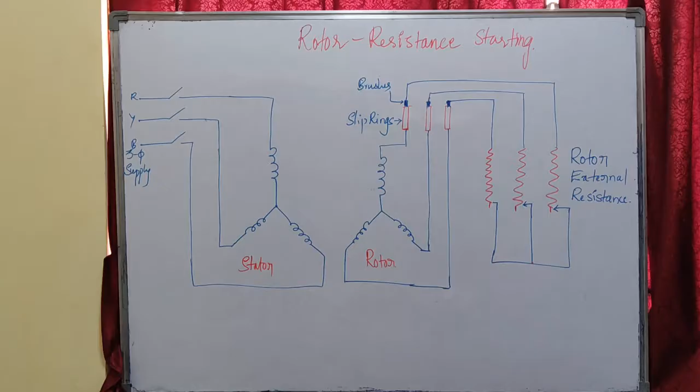Now let us discuss another starting method for our slip ring induction motor. This is the only starting method for slip ring induction motor, that is rotor resistance starting. For squirrel cage induction motor we were applying reduced supply voltage, but in case of slip ring induction motor we can apply our rated supply voltage directly onto the stator winding.

So the method is rotor resistance starting method. That means we are going to add some variable resistance in the rotor circuit through slip rings and brushes, and the rotor resistance is connected in star connection. The rotor of slip ring induction motor is always connected in star connection, whether the stator is connected either in star or delta, irrespective of stator connection.

So what we are doing is limiting the starting current. For that we keep the resistors in the rotor circuit. Initially they are at the maximum resistance position, meaning the three phases are having maximum resistance in the rotor circuit. By using this we increase the rotor resistance, so that our rotor current will reduce.

Our rotor current is directly proportional to our stator current, so the stator current will also be reduced. Due to increase in rotor resistance our starting torque will increase, and our power factor, which is the ratio of R2 by Z2, will also increase with increase in rotor resistance.

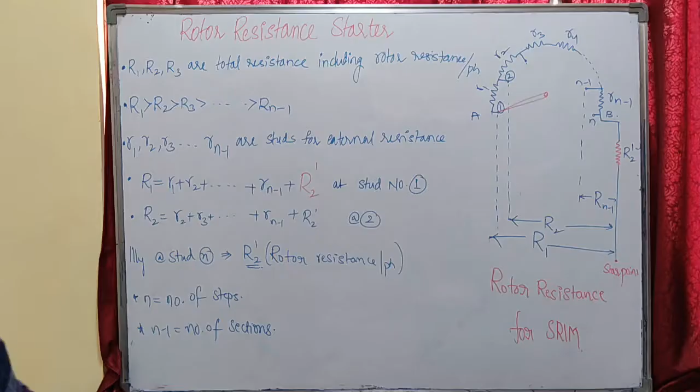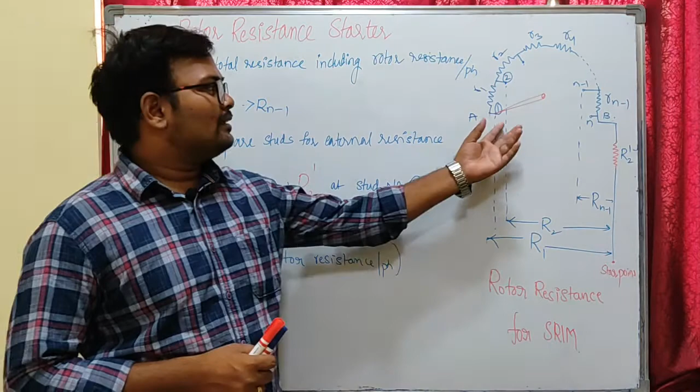Hello students, now let us see the rotor resistance method. As I earlier told you, we are going to add external resistance to the rotor circuit at the time of starting, which will reduce the starting current. Here this is the external resistance per phase added to rotor resistance per phase. The section A to B is the external rotor resistance connected to one phase of our three phase rotor circuit, that is R2 dash.

That means we will be having our rotor circuit connected in star in our slip ring induction motor. This is R2 dash here, our rotor resistance per phase.

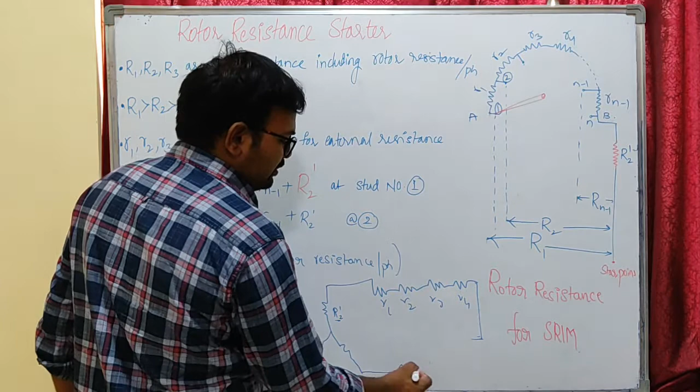So I am going to connect some external resistance. This is R1, R2, R3, R4 at the time of starting, and this will be connected in star only. These are the external resistances that are going to be connected for slip ring induction motors at the time of starting. I considered one phase here for simplicity.

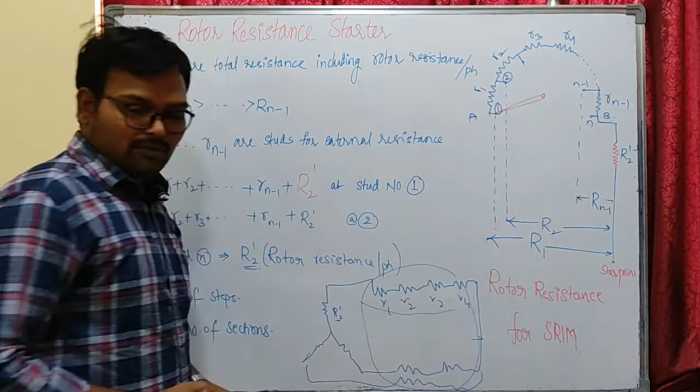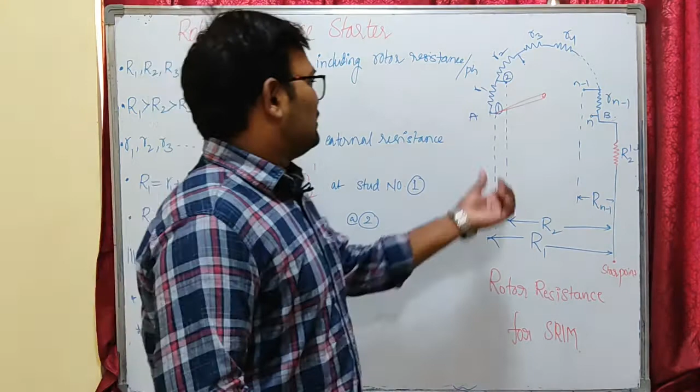Let us do some mathematical calculations for better understanding of our rotor resistance starting. Now we have to understand the rotor resistance first. Here you can see A and B is the section of rotor external resistance that is going to be connected with individual rotor sections R1, R2, R3, R4, up to Rn minus 1. The number of steps are 1, 2, and this is 3.

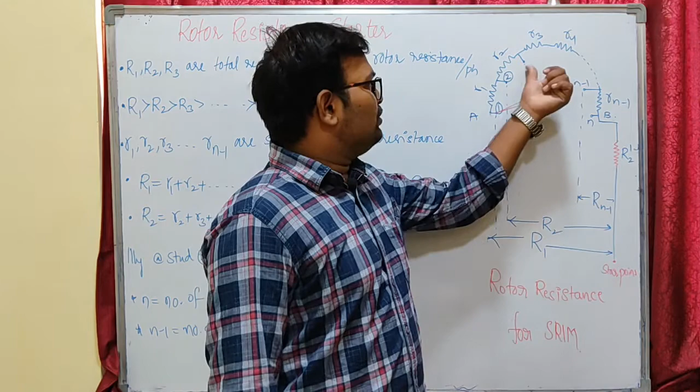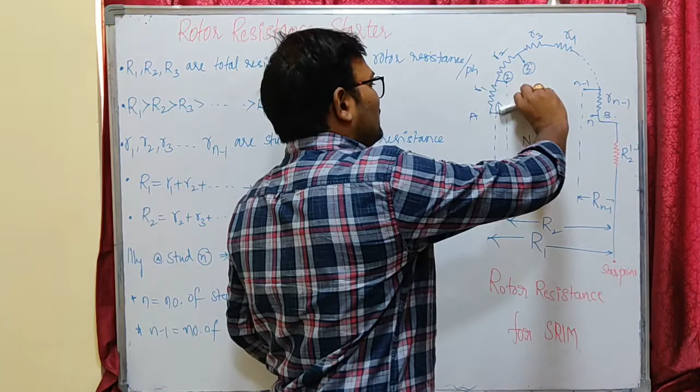We are going to connect the external resistance with maximum value at the time of starting, but gradually we are going to reduce the external resistance, and our speed of the machine will gradually increase from 0. This will increase, speed will increase as we are moving our external resistance circuit step by step. Gradually we are going to reduce the external resistance, and we will make it completely disconnected once our rotor attains 80% of rated speed.

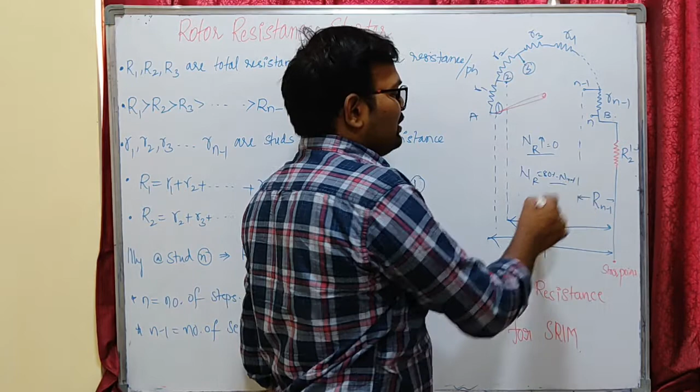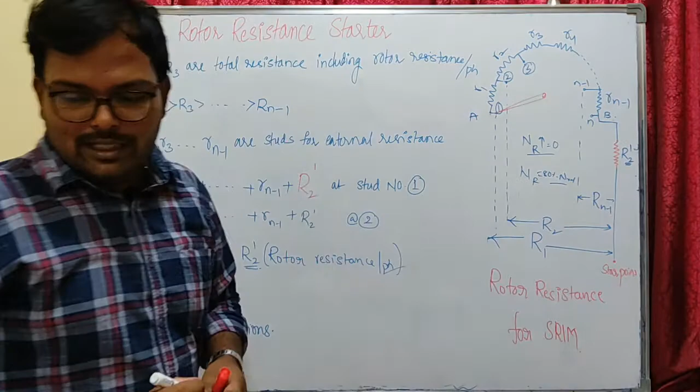Once our rotor of the induction machine attains 80% of rated speed, we are going to disconnect the complete external circuit in the rotor, and we are going to keep only our rotor resistance. Then our motor will operate under normal condition. So this is the idea: we are going to reduce the resistance step by step, so that our machine linearly gains speed and comes to normal operating condition.

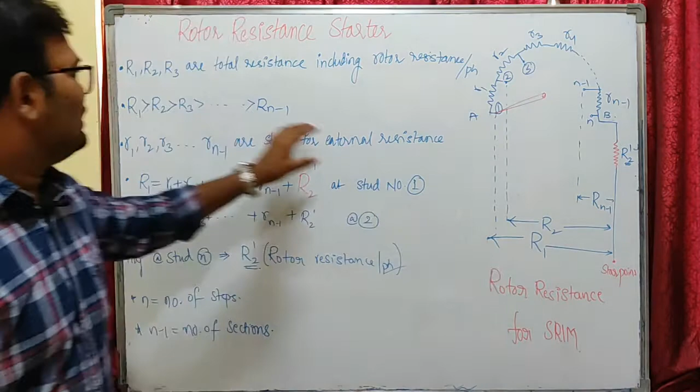So let us observe the things here. R1, R2, R3 and so on are total resistance including our rotor resistance. Here you can see R1 is nothing but R1 plus R2 plus R3 and so on, Rn minus 1, in addition to our rotor resistance per phase R2 dash. This is at stud number 1.

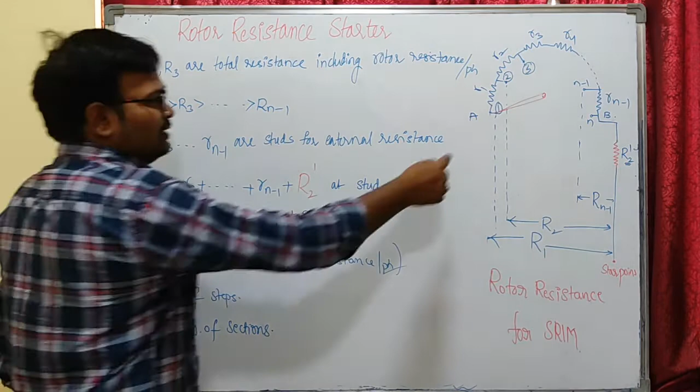At start, whenever I move this switch to number 2 position, I will disconnect R1 from the circuit. That means I will be left with R2 only. R2 is nothing but R2 plus R3 and so on, Rn minus 1, plus our rotor resistance, at position number 2.

So this will be continuously reducing, and our switch will be connected to stud number N. There we only have our rotor resistance, under normal operating condition. That means complete external circuit will be disconnected from the supply.

As we are moving our switch from maximum value to N, minimum value, our motor attains some speed and comes to normal operating condition. So we will be left with only rotor resistance per phase. N is the number of steps, N minus 1 is the number of sections, meaning R1, R2, R3 and so on, Rn minus 1 are the number of sections.

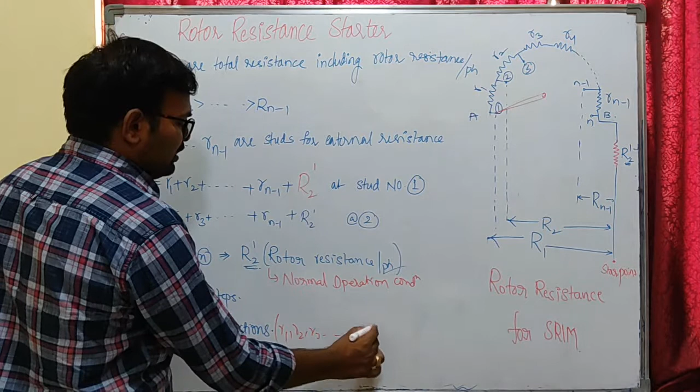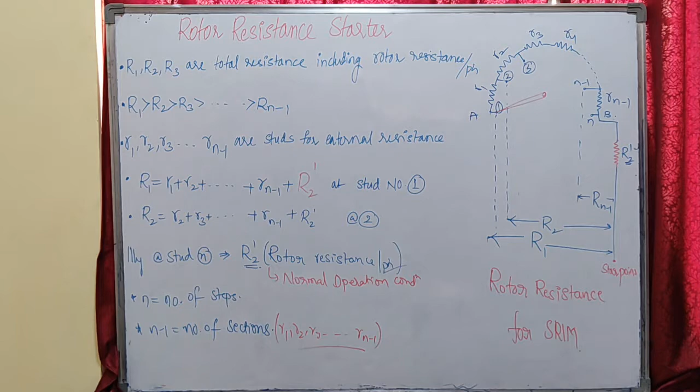Now we have to make two assumptions here. That means the motor starts against a constant torque - the starting torque of the motor is assumed constant. And the starting current, the rotor current, fluctuates between two fixed positions: maximum position and minimum position. Let us see what they are.

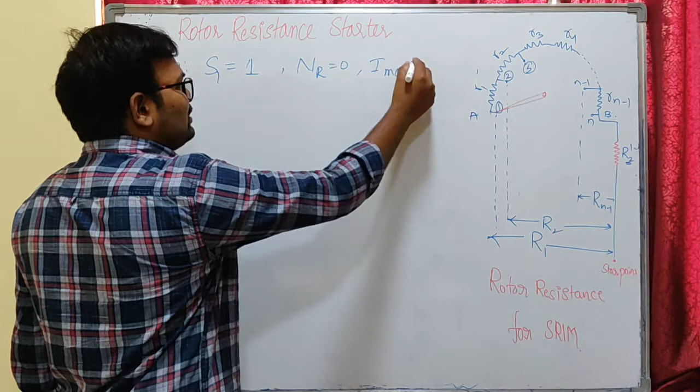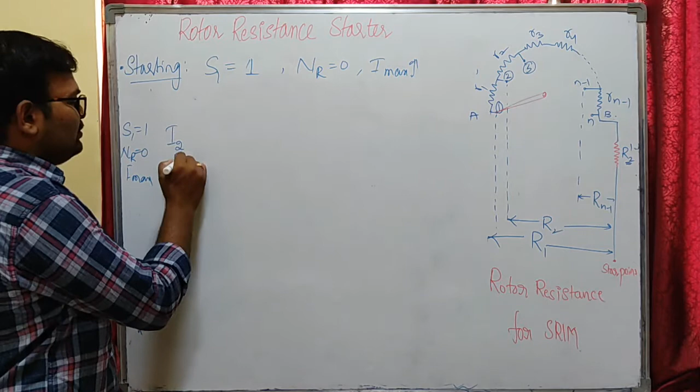Our current at the time of starting condition: our slip S1 is 1, maximum. Our rotor speed is 0 - there is no rotor speed at the time of starting, and the current drawn from the supply is maximum value. That means at the time of starting, our slip is 1, there is no rotor speed, and our current is maximum. Our rotor current will become maximum value, equal to E2 by... E2 is the rotor EMF per phase, rotor EMF induced per phase.

You already know that, so the current expression will become: initially we are going to add total resistance, that is R1 rotor resistance by slip S1, whole square, plus x2 square. So this is the maximum current at the time of starting with resistance R1, and the position of the switch is at stud number 1. This is my position.

Now what happens is, whenever our rotor picks up some speed - at the time of starting that was 0, now our rotor starts rotating - our slip value will become less than 1, S will become less than 1. That means our S2, I consider the first one as S1, so now this is S2, so S2 will always be less than our S1. Because slip is reduced, our current will reduce.

So that will be called minimum current, equal to E2 by resistance, same R1, but slip is changed here, this is S2. So as the slip is reduced, our current is reduced to minimum value.

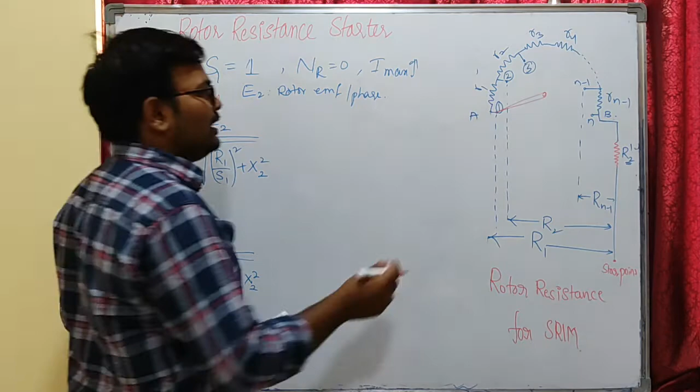Now what we do, we change this stud to position 2. This is the new position of the switch, meaning our rotor resistance will be connected to R2 here.

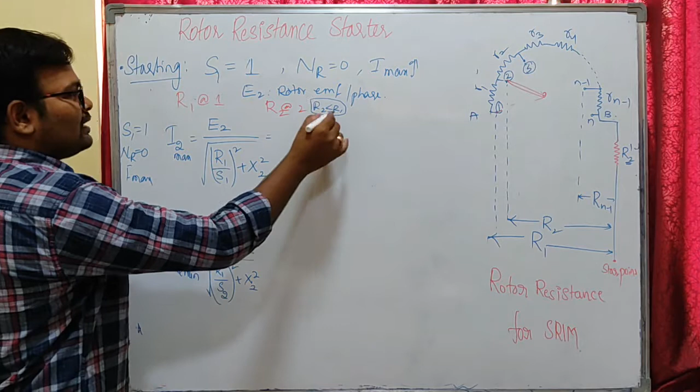Now we have changed the rotor resistance from R1 to R2. As R2 is less than R1, that means we have disconnected some resistance, so the resistance of the rotor circuit is reduced now.

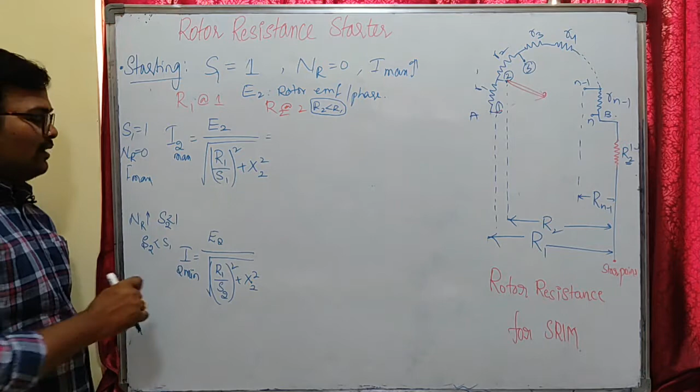So because resistance is reduced, our current will again draw maximum value, because we have reduced some resistance, but slip cannot be changed suddenly. We switched the resistance, but the speed of the machine can't change momentarily, so there is no change in the rotor speed suddenly, meaning there will be no change in slip.

That means the slip will be same, but the current will be maximum at the time of switching to the second position. The resistance is R2 here, but the slip is same, since slip can't change suddenly, as the speed of the machine can't change suddenly. This is my new slip S2.

Now what happens? After some time the slip will reduce, and as slip reduces, our current will reduce to minimum value. So that will become R2 by, now the new slip is S3.

You can observe the thing, right? The slip is changing from here to here, but it is constant from here to here. The current is changing from here to here as well, and it is maximum here, minimum here, maximum here, minimum here.

Slip is S1 here, S2 here, but the slip is same here, and now it is reducing. Slip is reducing from this to this, and not reducing from this to this. It reduces from maximum value to minimum value, but stays the same from minimum value to maximum value. So this is the idea.

As slip value is reducing, our current will reduce. This will continue until we get our rated current, that is under running condition, normal running operation.

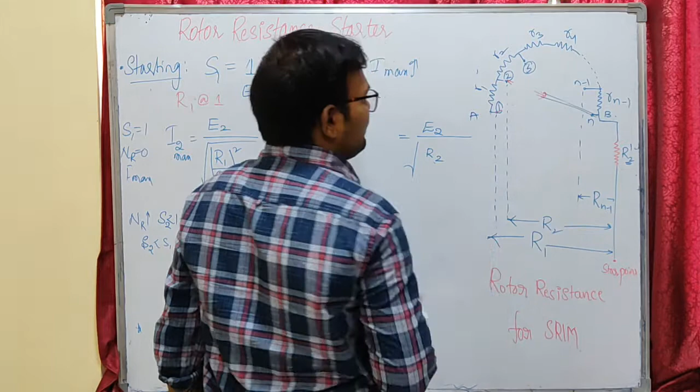Whenever we connect this switch, this process will continue until we get our normal operating condition, that means this will be equal to our rotor resistance R2 dash by S at normal operating condition, S maximum, plus X2 square.

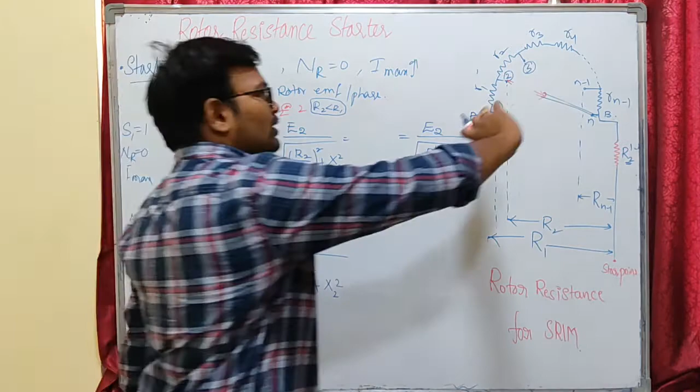So this process will continue as we are forwarding step by step, and it will continue until we connect the switch to the N position, where the resistance will equal the rotor resistance per phase, R2 dash.

So this process will continue, and the minimum current will also continue until we get R n minus 1, that is E2 by R n minus 1 by S maximum, whole square plus X2 square.

So after this, the maximum value will be the final one, R2 dash, after R n minus 1. That means after R n minus 1 is this one.

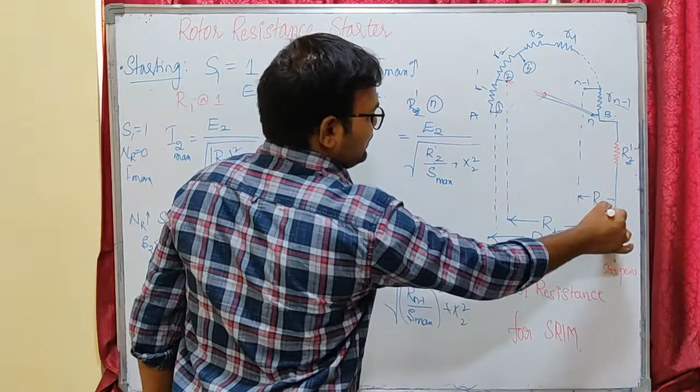After R n minus 1, I will connect to the nth step, that will become R2 dash by S maximum and X2 square. So our S maximum is nothing but the slip at normal operating condition.

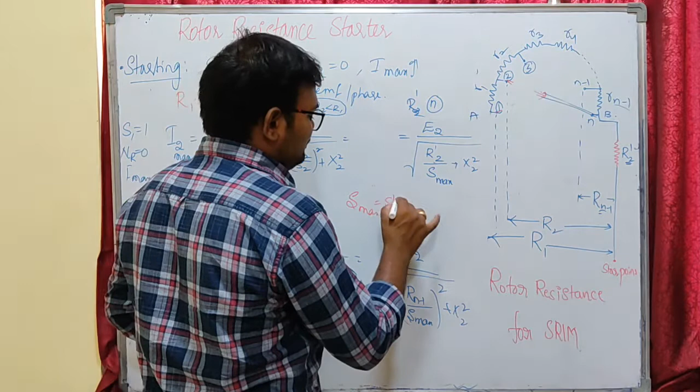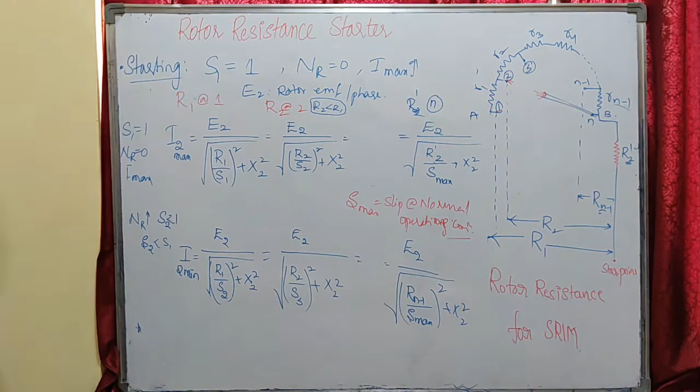By now our speed of the machine will attain rated speed. Whenever this switch reaches the N position, by then our speed of the machine attains the rated speed, or about 80% of rated speed. So this is the idea here.

Now from these two equations we can observe two things. From I2 maximum and I2 minimum we can observe that all these expressions are equal, so I can make these terms equal.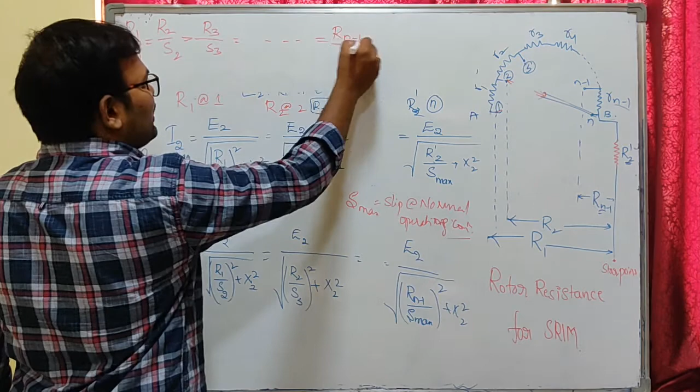That means our R1 by S1 can equal R2 by S2 and R3 by S3 and so on. I can equate R n minus 1 by S n minus 1 equal to our normal running condition, that is R2 dash by S maximum. This is my equation 1.

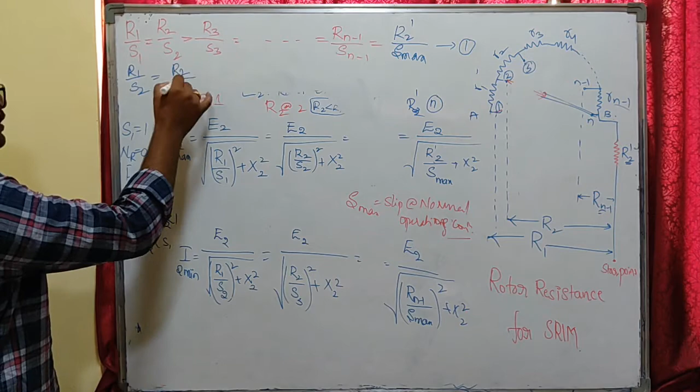So from this I2 minimum, I can also write R1 by S2 equal to R2 by S3 equal to R3 by S4, and so on, equal to R n minus 1 by S maximum.

I am going to take this as equation 2. These two are the expressions I wrote from I2 maximum and I2 minimum, meaning our supply current or rotor current is fluctuating between two fixed positions, that is maximum current and minimum current.

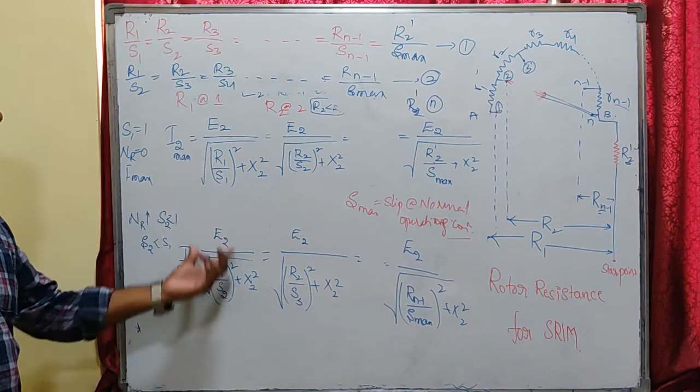Okay, this is the idea. Now let us see what is happening.

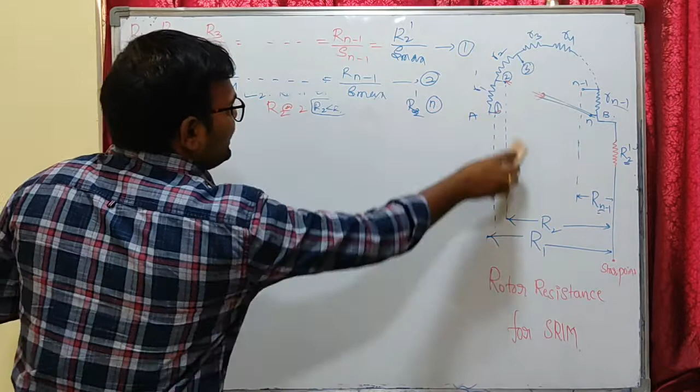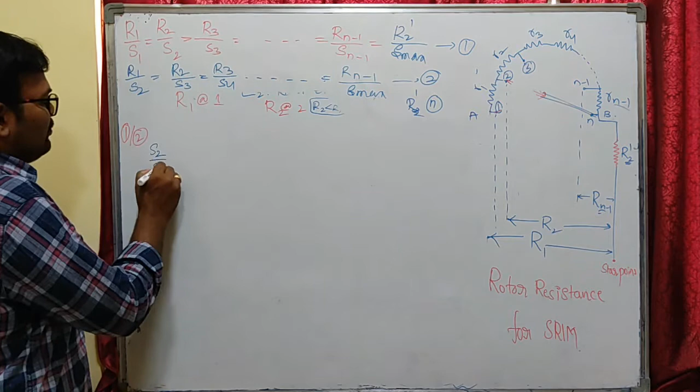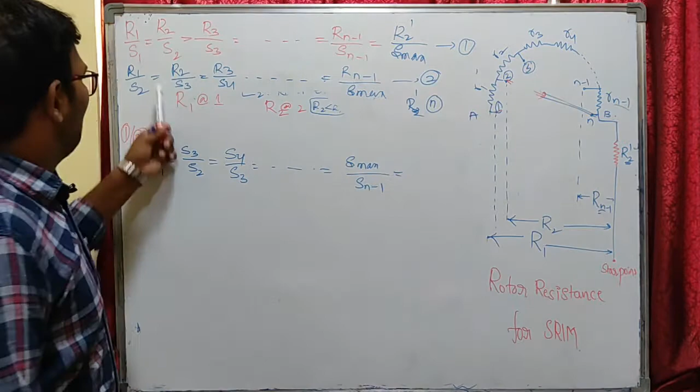We can calculate the external rotor resistances R1, R2 and individual rotor resistance using these expressions. By dividing equation 1 with equation 2, I can write S2 by S1 equal to S3 by S2, equal to S4 by S3 and so on, up to S max by S n minus 1. This can be equivalent to R2 by R1 equal to R3 by R2, and so on, up to R2 dash by Rn minus 1.

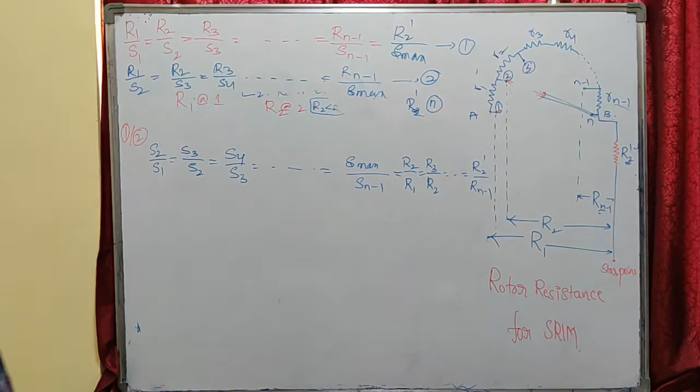Now I am making this whole expression equal to K. I am saying the expression is equal to K. Now let us see what is happening.

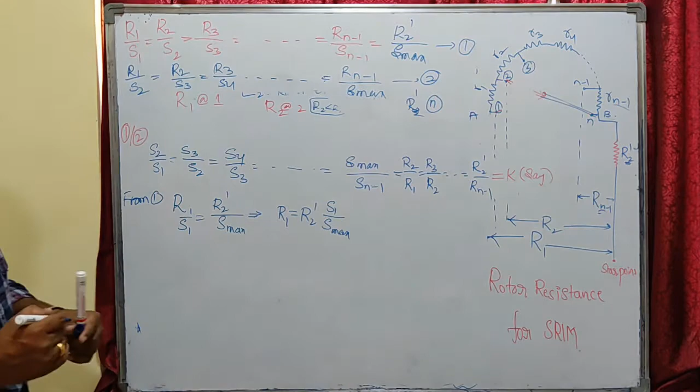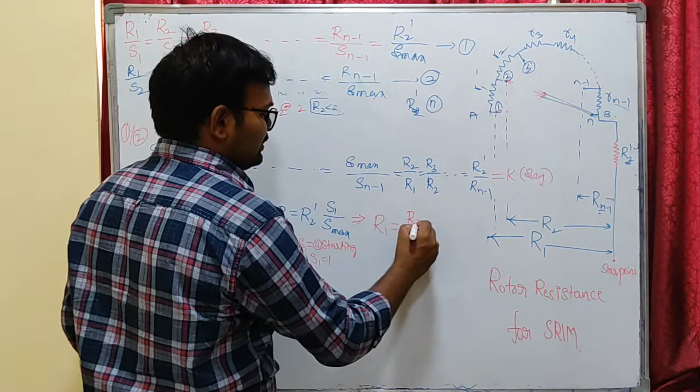The beauty is, from equation 1 I can write R1 by S1 equal to R2 dash by S max, where R2 dash is the rotor resistance per phase. So R1 equals R2 dash into S1 by S maximum. Here S1 is the slip at position 1, that is, slip at starting. You know the value of slip at starting is equal to 1. So the expression becomes R1 equal to R2 dash, which is the rotor resistance, by S max, which is the slip at running condition.

So this is the expression for R1, which is the sum of R1 plus R2 plus until Rn minus 1, in addition to our rotor resistance. So this is one we got.

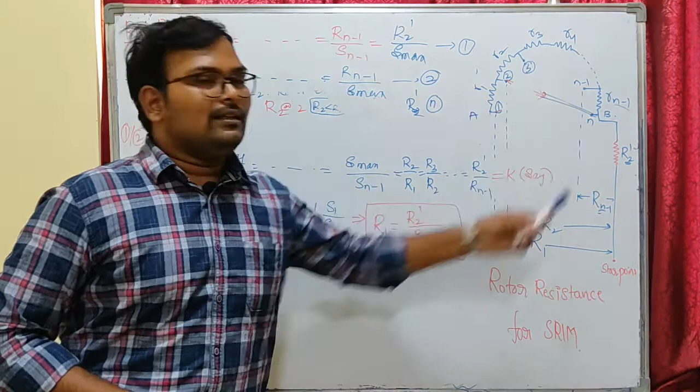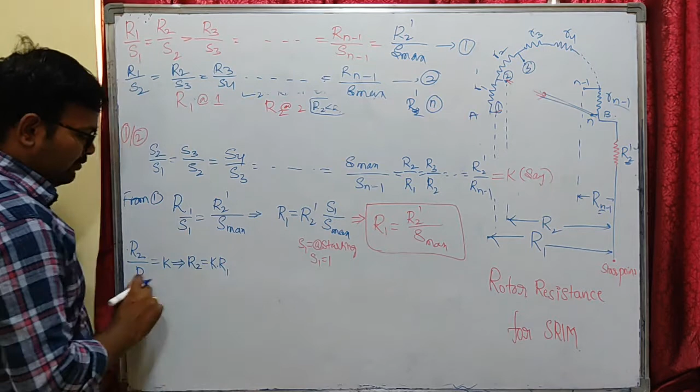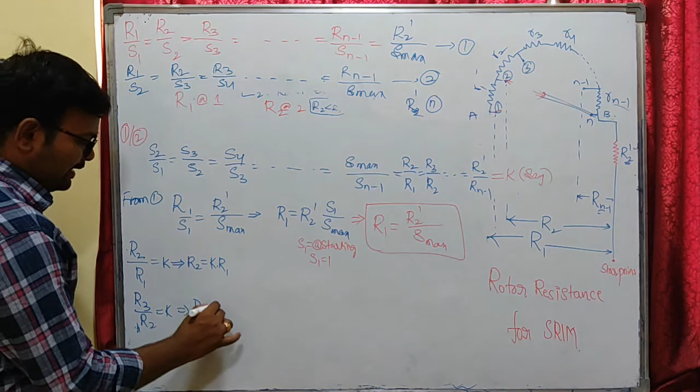Now from expression 2, I can write R2 by R1 equal to K, so R2 equal to K times R1. Similarly R3 by R2 equal to K, which gives R3 equal to K times R2. I can replace R2 here with K R1, so it becomes K times K R1, that is K square times R1. And so on, R4 by R3 equal to K gives R4 equal to K times R3. Replacing R3 with K square times R1, this becomes K cube times R1.

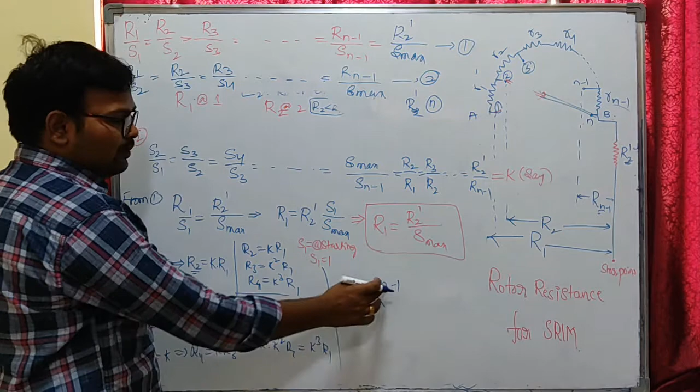That means R2 dash is nothing but the resistance at N star. So R2 is K R1, R3 is K square R1, and R4 is K cube R1. These are the expressions we got till now. So R4, considering this as N, this becomes N minus 1 into R1. That means R2 dash, resistance at N star, equals K power N minus 1 into R1. This is the expression for rotor resistance per phase in terms of K value and total rotor resistance.

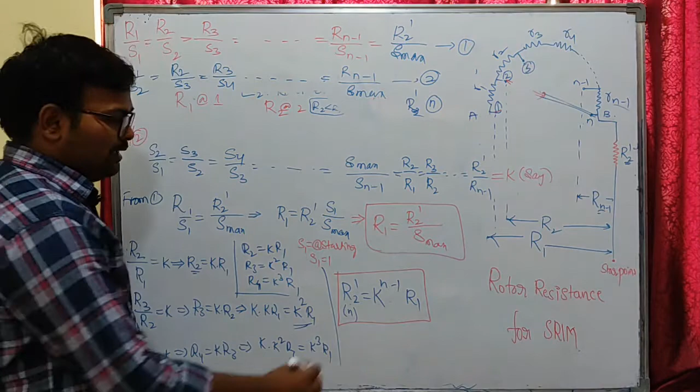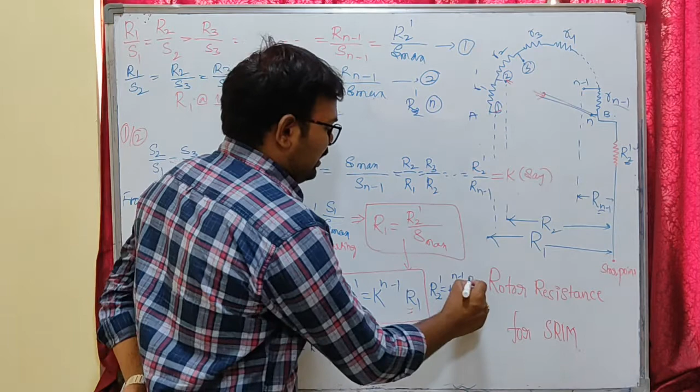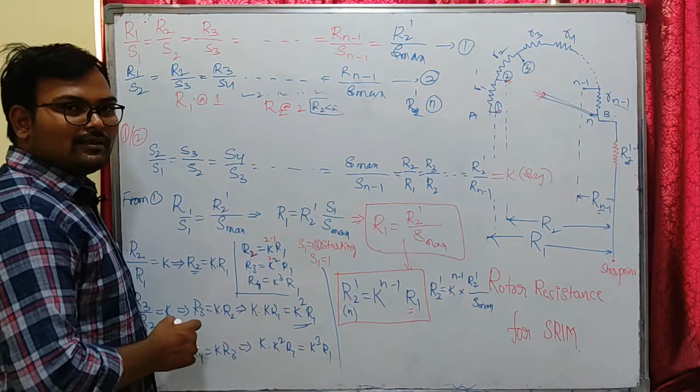If I replace R1 with this expression, R2 dash equals K power N minus 1 into R2 dash by S maximum, since we are replacing R1 with R2 dash by S maximum. I have written this expression based on the pattern: initially at position 2, 2 minus 1 is the power of K; at position 3, 3 minus 1 is the power of K; at position 4, 4 minus 1 is the power of K. So whenever we connect to position N, R2 dash is the resistance at N position, which becomes K power N minus 1 into R1. So now I can cancel out R2 dash on both sides.

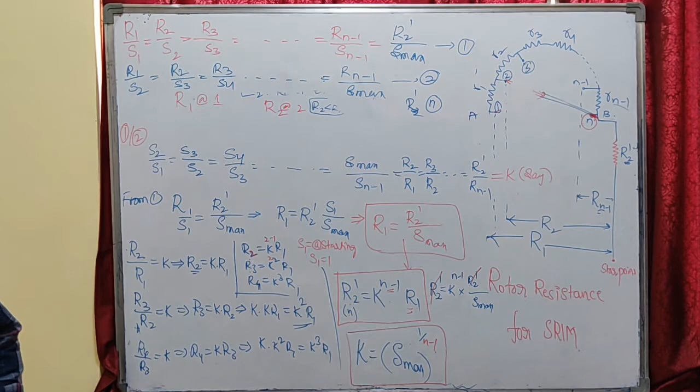The value of K can be written as K equal to S maximum raised to the power of 1 by N minus 1. So this is the expression for the value of K here: K value is S maximum power 1 by N minus 1, where N is the number of starter studs, and S maximum is the slip at normal operating condition.

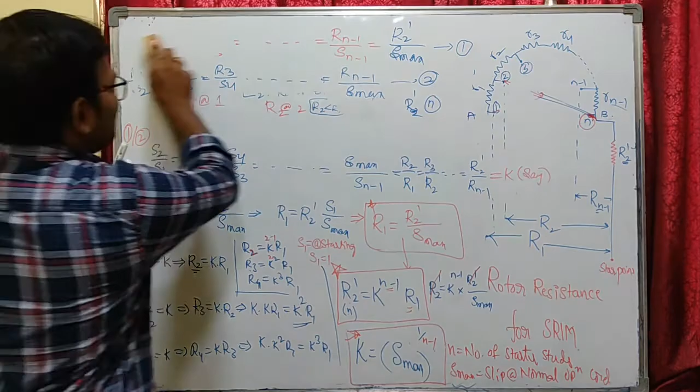Okay, so this is the value of K, and these are the things to remember here, this one and this one. We will be doing some problems, so that you must remember those things. Now let us calculate the individual stud values.

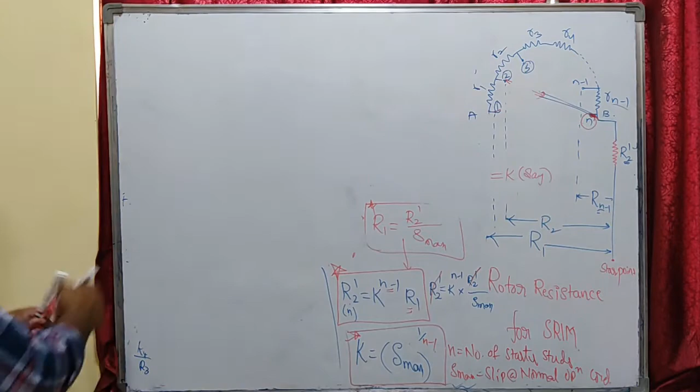Let me calculate our R1 first. R1 is nothing but, I can write it as total resistance R1 minus until this, that means R1 minus R2 can be written as my small r1. So this will be written as R1 minus R2 is nothing but K times R1. R2 is nothing but K times R1, so that will be equal to R1 into 1 minus K. Can you write like this?

Now our second rotor stud R2 can be written as R2 minus R3. That can be written as K times R1 minus K square times R1. I can write R2 as K times R1 and R3 as K square times R1, that will become R1 into K minus K square.

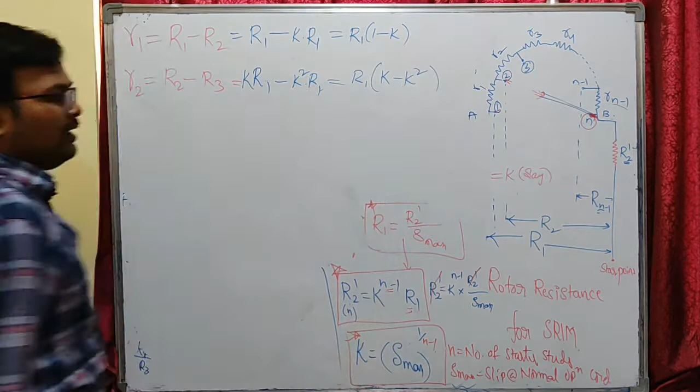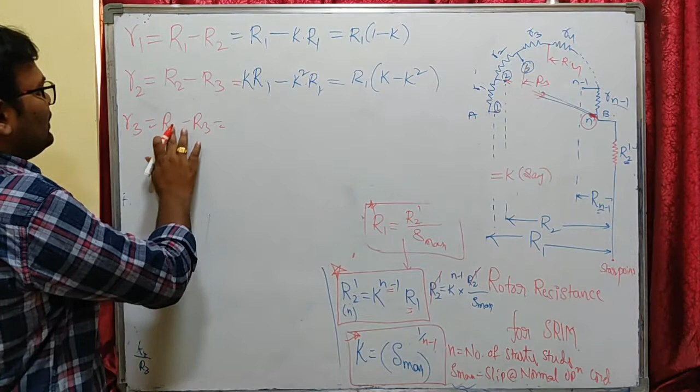Similarly I can write r3 equal to R3 minus R4. When I subtract R4, this complete R3 - this is R3, this is R4. When I subtract R4 from R3, that will be left with R3. So that will become K square times R1 minus K cube times R1, that will become R1 into K square minus K cube.

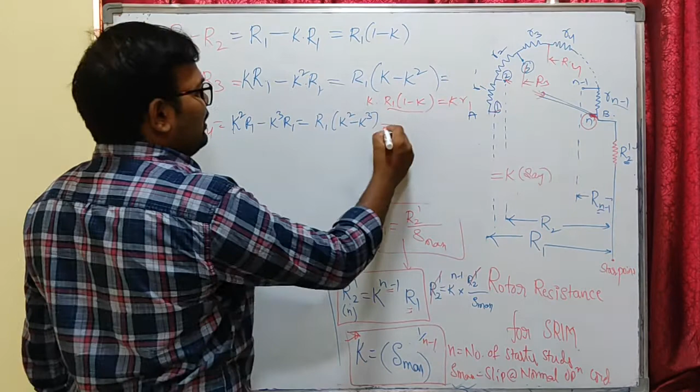That means I can write this as, if I take the K common, that will become K times R1 into 1 minus K. Here if I take the K common, R1 into 1 minus K is nothing but my small r1, that means this is K r1. R2 is nothing but K times r1. Similarly, I can write r3 is nothing but K square times r1.

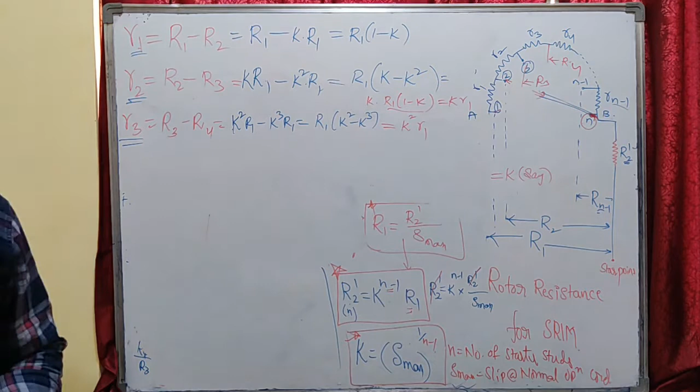So this is the value of r3 and this is the value of small r2, this is the small value of r1. Hence, it is seen from above that if S maximum is known for the assumed value of I2 max of the starting current, then n can be calculated. So let us take some problem so that you can understand the whole concept clearly.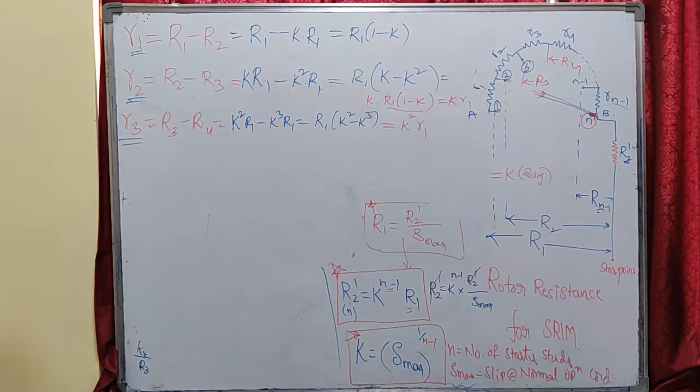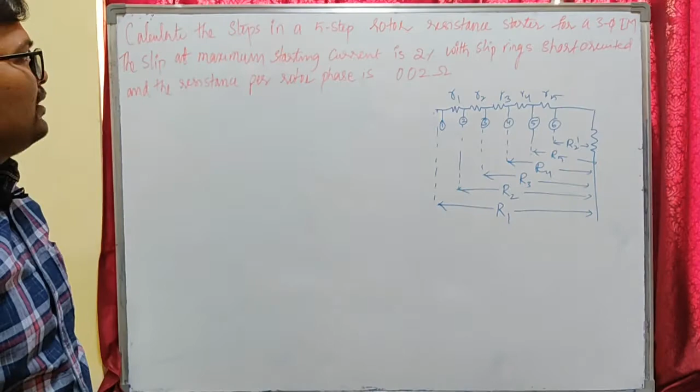Let me take a problem. Now let us see a problem based on our rotor resistance. So the problem is: calculate the steps in a 5-step rotor resistance starter for a 3-phase induction motor. The slip at maximum starting current is 2%, with slip ring short circuited, and the resistance per rotor phase is 0.02.

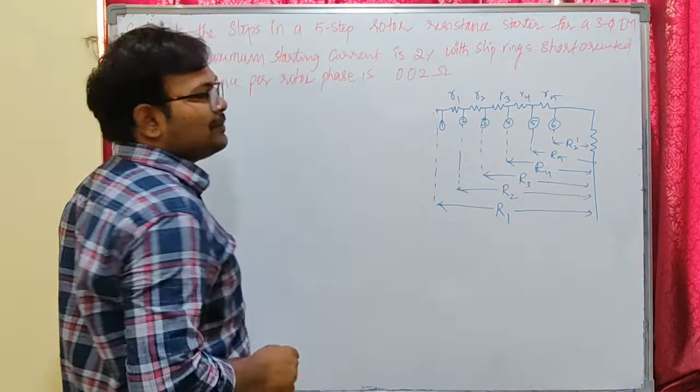He asked you to calculate the steps in 5-step rotor. You have to calculate these steps R1, R2, R3, R4, R5, 5 steps with the number of studs as 1, 2, 3, 4, 5, 6. So let us write the given data first.

Given data is there are 5 step studs, that means R1, R2, R3, R4 and R5. That means number of sections are 5 and number of steps are 6. You can see these steps are 1, 2, 3, 4, 5, 6.

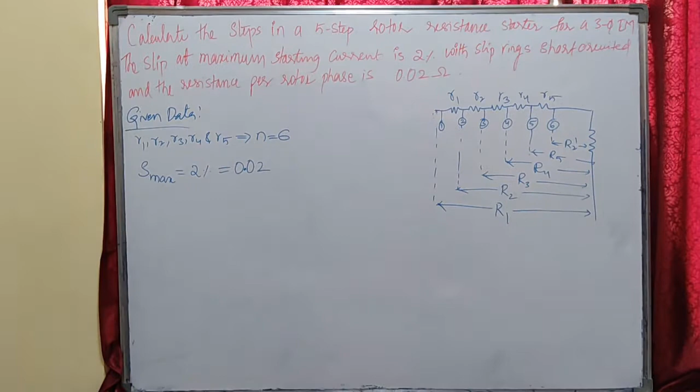Now he asked us to find R1, R2, R3, R4, R5 - calculate the steps. Now for that, the given data is slip at maximum current condition, that is S max is 2%, that is 0.02. And he short circuited the rotor resistance, and the rotor phase resistance per phase, that means our rotor resistance per phase is R2 dash equal to 0.02.

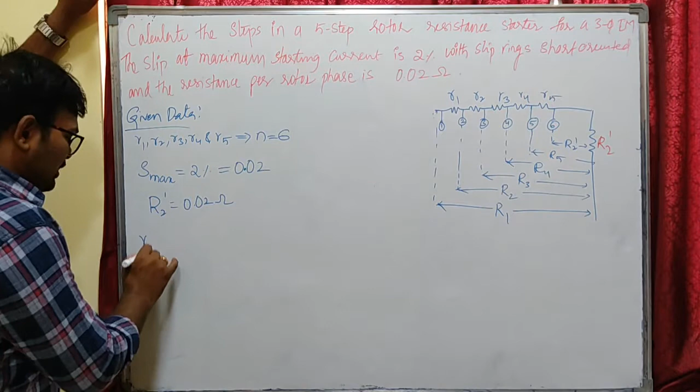Now we have to find our R1, R2, R3, R4. So how can we find R1? R1 is nothing but our capital R1 times 1 minus k, from previous equation. And R2 is equal to k times my small r1, R3 equal to k square times small r1, R4 equal to k cube times small r1, and R5 is nothing but k power 4 times my small r1.

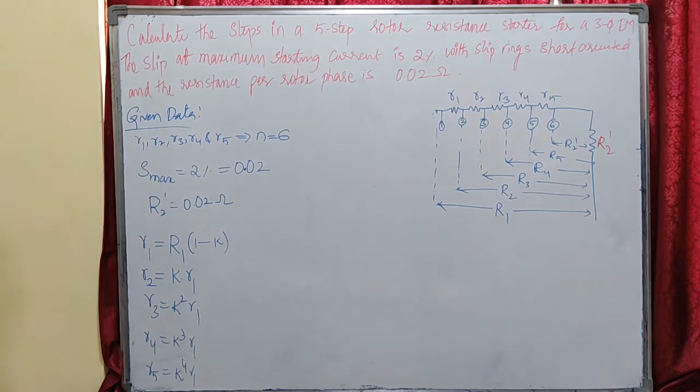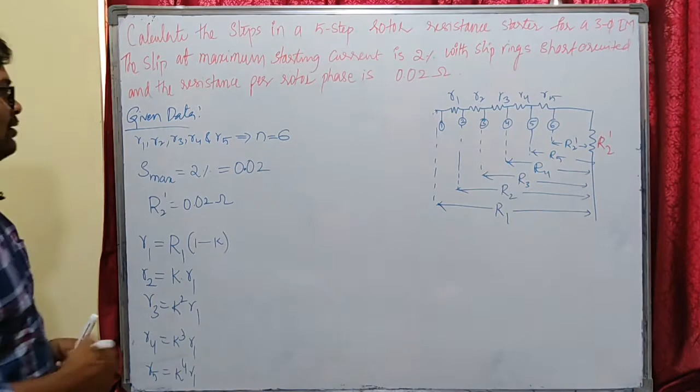So let us calculate the value of k and r1 so that we can get small r1. If you get k and small r1, you can get all the number of sections. So let us find the value of k first. K is nothing but we have the expression for k with S maximum equal to S maximum power 1 by n minus 1. This is the expression for value of k.

Okay, this is the expression to find the value of k. The k can be found by substituting the values: S maximum is 0.02, and the number of sections is 6. Number of sections are 5, but number of steps are 6 here, so I can write it as 6 minus 1. The value of k will be equal to...

0.4573. After simplifying, the value of k is 0.4573. We got the value of k. Now we have to calculate the value of R1, which is nothing but our total resistance R1.

So we have the expression for R1, which is equal to our total rotor resistance divided by S maximum. This is another relation we have for the rotor resistance starter. By substituting the value of R2 dash, which is rotor resistance given as 0.02, and our slip at maximum condition, that will be equal to R1. R2 dash is nothing but rotor resistance per phase 0.02, and slip at maximum is 0.02. So R1 is equal to 1 ohm here.

We got the value of k as 0.4573 and the value of R1 as 1 ohm. Using these data, we can calculate R1, R2, R3, R4 and small r1. Now let me calculate small r1, that will be equal to 1 into 1 minus 0.4573.

R2 is equal to k, which is 0.4573, times R1. What is the value of R1 here? The value of R1 is 0.5427... 0.5437... the value of R1 is 0.5427.

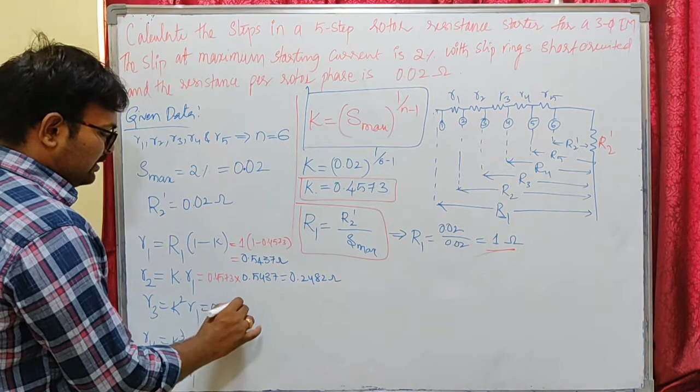And the value of R3 is, if you multiply K square times our value of R1, which is 0.5437. If you get the value of K and R1, you can find out all the values. That is the idea. So to find the K value, this is the expression. To find R1, this is the expression. So let us find R3 here.

So R3 is equal to 0.1135 ohm, and R4 is nothing but 0.4573 whole cube, or which can also be equal to... which R4 is nothing but K times R3 also. R4 is nothing but K times R3. You can find that one also.

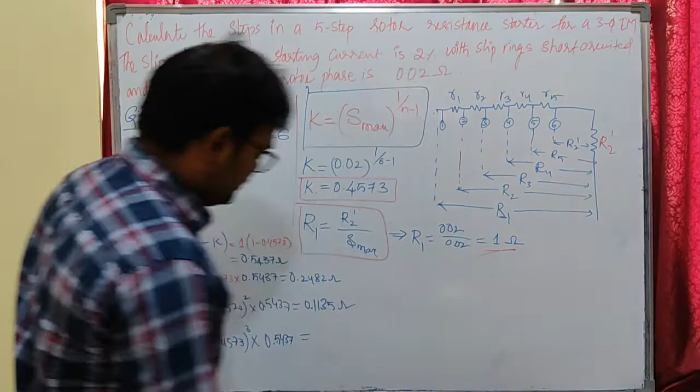What I am doing, this is 0.5437. So the value of R4 is 0.0519. Okay, so the value of R4 is 0.0519, and the final value is, I can write R5 as K times R4 also. So that will become 0.4573 into 0.0519, which will be equal to 0.0237 ohm.

So these are the values of the individual stud values. To get these total resistance values: R2 is nothing but K times R1, R3 is nothing but K times R2, R4 is nothing but K times R3, and R5 is nothing but K times R4, and so on. R5, which is the last one, is nothing but K times R4. Now let us find these values.

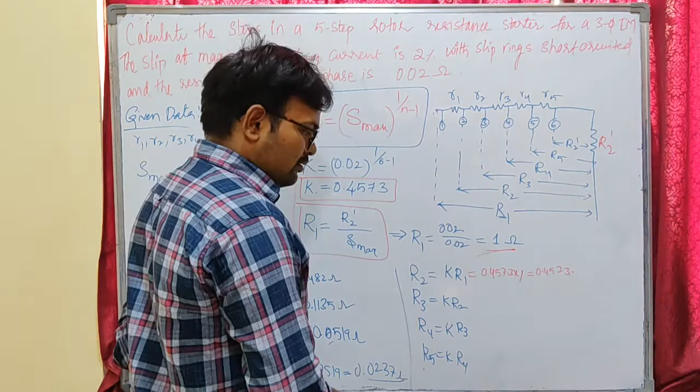So R1 is 1 ohm, and R2 is 0.4573 times 1. The value of K is 0.4573 into 1, that becomes 0.4573. Now let us calculate R3, that will become 0.4573 into R2 value 0.4573, which equals 0.2091 ohm.

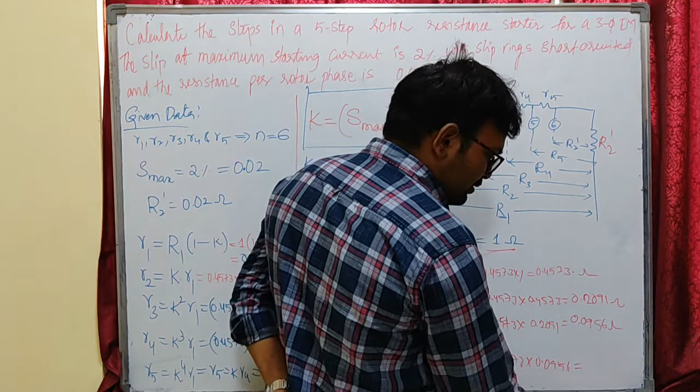All are ohmic values, and R4 is nothing but 0.4573 K value into the value of R3, that will be equal to 0.2091, giving R4 as 0.0956 ohm. And the final value R5 is nothing but 0.4573 K value into 0.0956 R4 value, and R5 value is 0.0437. So these are the values for R1, R2, R3, R4, R5, and capital R1, R2, R3, R4, R5.

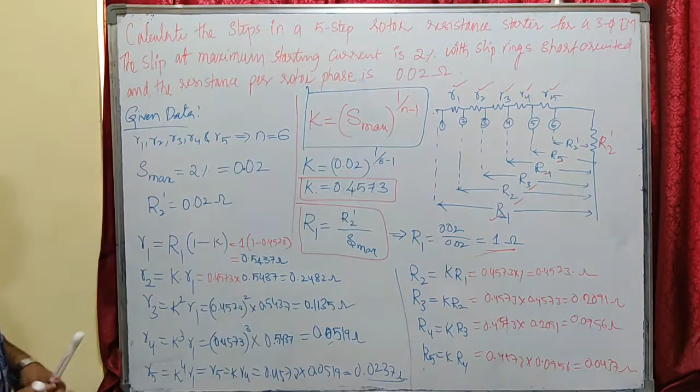So this is about rotor resistance control. These two are the important expressions to be remembered for the entire concept, and the relation between them: R2 by R1 equals R3 by R2 equals K.

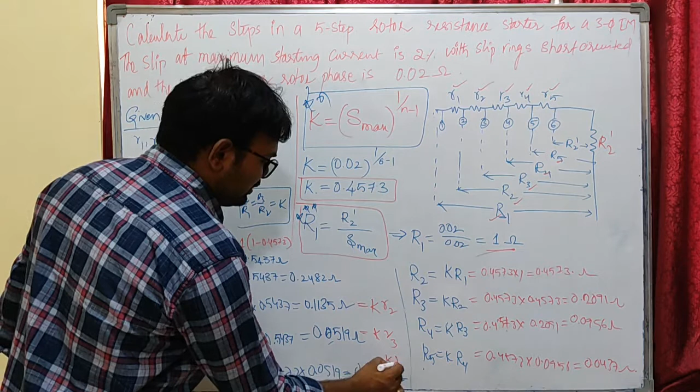And the relation between these: small r1 equals capital R1 times 1 minus K, small r2 equals K times R1, and small r3 equals K times R2. This R3 can also be written as K times small r2, R4 can be written as K times R3, and R5 is written as K times R4. So anyway, you can get the expressions and answers.

So with this we have concluded our starting methods of induction machine. I hope you understand. If you have any doubts, you can ask me. Thank you.